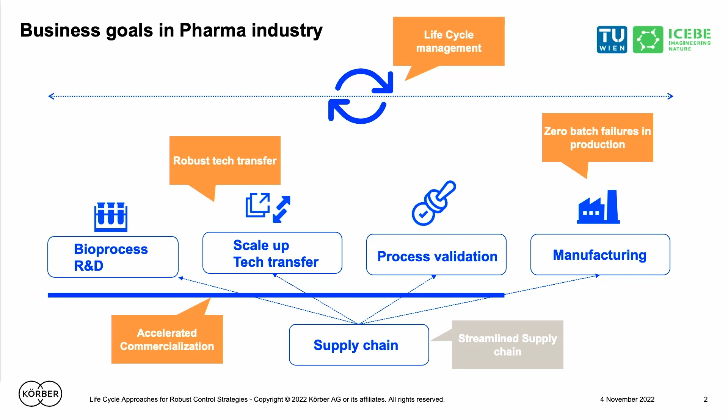And I think that's very important to mention that whatever we do, we not do only once, okay? So all business processes and data science methods, whatever we do, have to be made for continuous improvement along ICH Q12. I think you're aware of that very much, right?

So what is the task, actually, to fulfill this kind of thing? It's just this simple equation. So we just have to get the quality right on the right side. And we just have to find the relationship to the CPPs, to the raw material or critical material attributes, and that's all. Then we are done, okay?

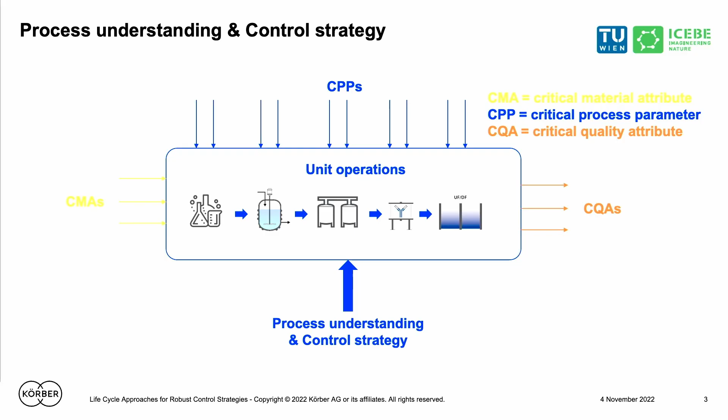The question is, it's not that easy. CQAs, we have about 15, probably in any biopharmaceutical business, whatever. And we have probably along the process chain about 400 CPPs and probably 100 CMAs or 15, probably we don't know them even. So the uncertainty plays a role.

So this is the equation which we have to solve. It's a multivariate, multidimensional problem which we have to address here. And there are two steps which we have to do to get a control strategy. First, we have to get the understanding how these things are related. And then the second thing is how to actually maneuver in there, right? I think these two steps we have to do.

The control strategy, for those of you which are not probably familiar with that, is mainly exemplified in ICH Q10. And it's about the linkage of the complete process chain, I will come back to that later, to, let's say, the drug substance, drug product, or probably the patient. It depends a little bit where you put actually the envelope, right?

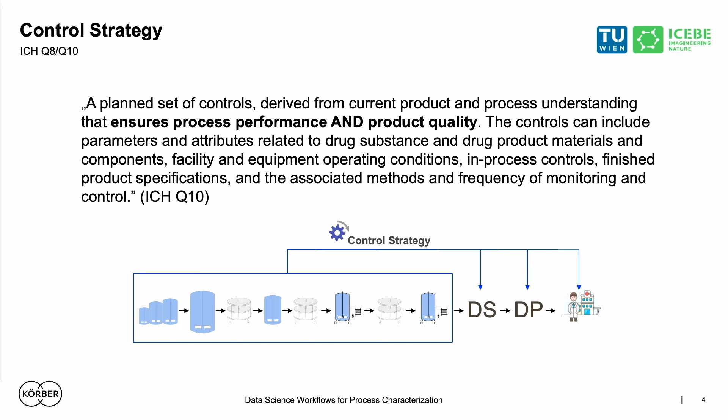And when you work in cell and gene therapy, probably you should really go into even looking at the patient more. So we have to set up control strategies, and I quote here something which we have also published, the article of the year, something in ISPE, on holistic control strategy.

What's the difference between a control strategy and a holistic control strategy? If you set up a normal control strategy on the left-hand side, this is what you submit, and then, in the future, the manufacturing, so that's the right side of the picture, will give you additional challenges. So there will be variability from the equipment, from the biology, from the aging of the equipment, of manual interactions, etc. Lots of different elements, which all come from the life cycle and the scaling.

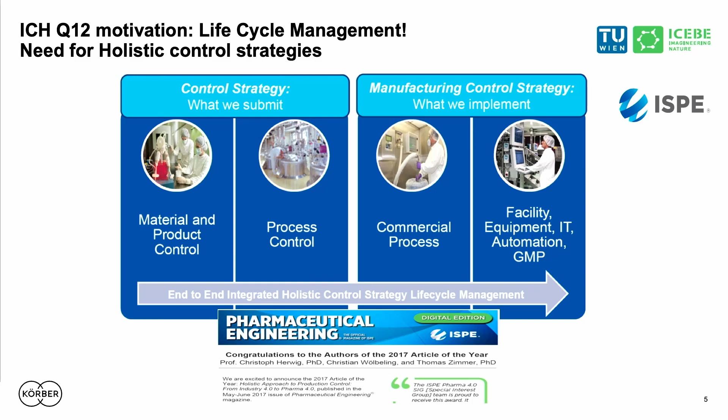And the control strategy has to anticipate those kind of elements, right? They have to anticipate all these changes, how to do that properly. And this is the holistic part of it.

The control strategy can be implemented on probably 3 different levels. This is a slide from Lawrence, a friend, quoting that level 3 is, of course, where we should not be. It's end product testing, right? It's about this bottle. I always count on that, but we should move off that. We should aim for the performance-based level. This is level 2, where at least we have some process understanding and we're maneuvering inside the design space. That's fine, but when you think about intensified bioprocessing for continuous biomanufacturing, you don't have time to really take a sample.

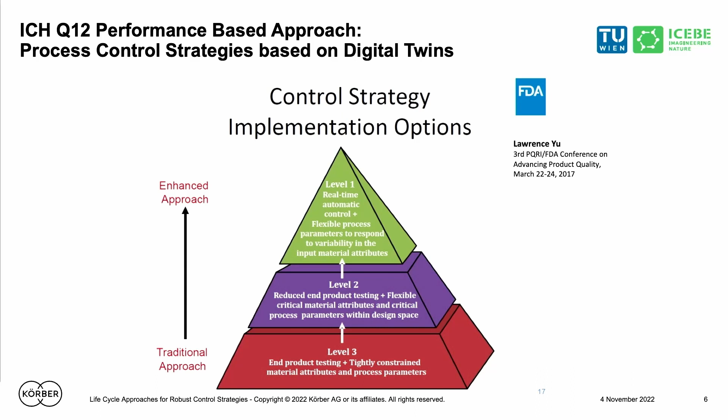So then we need to move to the upper part, which is real-time automated control with flexible process parameters to respond to variability in the input material attributes. Big thing. Are we there? I want to show you with my presentation a little bit how we can actually achieve that and get to level 2 and level 1.

Yash motivated this conference by saying we need a kind of 'how' approach. How do we really do that? So I want to show you a couple of elements in this direction and some prerequisites.

If you want to get something robust, you have to tackle variability. And the variability you have to identify, monitor, and control. There are a couple of methods around that. Of course, there can be models to identify this. This is monitoring, which is PAT, process analytical technology, a big part that always runs into that. And of course, data science.

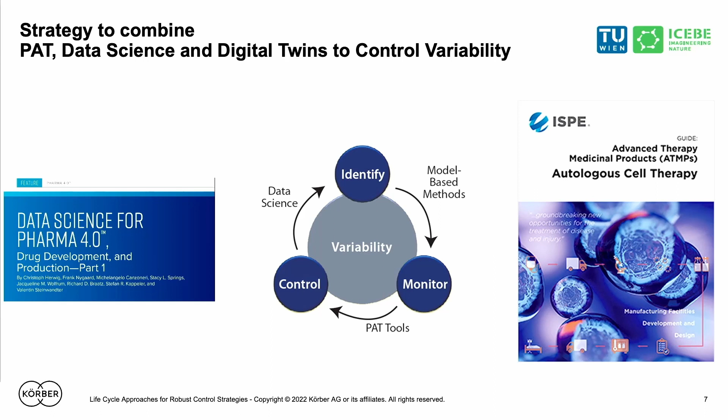We have published these kinds of things in the PE magazine on data science for Pharma 4.0. This is something with MIT and a couple of companies, Merck included. Probably have a look. Also in this autologous cell therapy good practice guide, just recently, wherever you are moving, in whatever kind of product, the task is always the same: it's tackling variability. Look at that.

And variability, of course, probably you can measure it. It's nice. Probably there's also uncertainty in there, and how to tackle this. You saw my comment yesterday in this conference. How to do that? So one enabler of that is definitely digitalization.

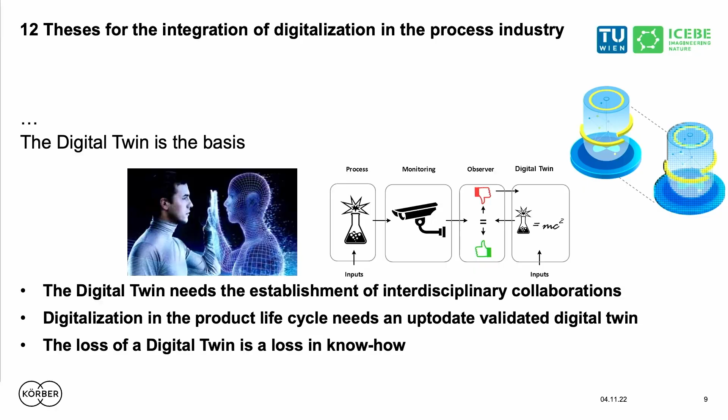There are a couple of hypotheses along that line which I want to show you. Here is one: the digital twin is the basis for integrating digitalization in the process industry. And I like the last sentence here: the loss of a digital twin is a loss of know-how. I would like to emphasize that I believe the digital twin is a means to capture knowledge and to deploy knowledge. We will see some examples here in this keynote.

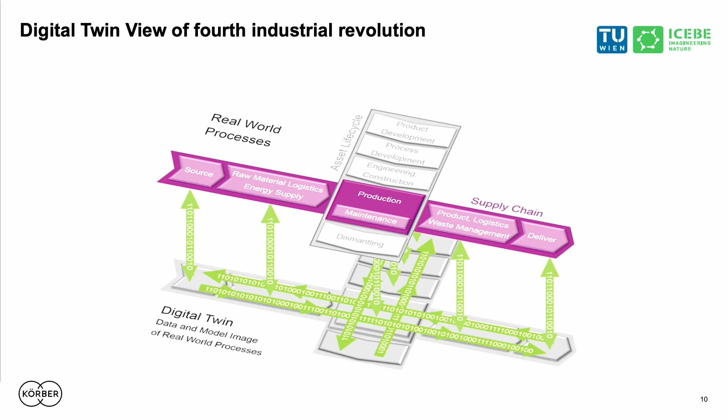It's a loss of know-how, and the digital twin can exist in many different dimensions. You see here the different dimensions: the supply chain dimension as well as the asset life cycle — these two elements. There can be a digital twin for all of that, but I'm not building a digital twin for all of it. I mainly work on the asset life cycle in development and transferring that to production. Of course, there should also be twins in the supply chain area — that's not my work. And finally, when you think about Pharma 4.0, it should be somewhat connected. There's no doubt. That's the motivation I wanted to give you here.

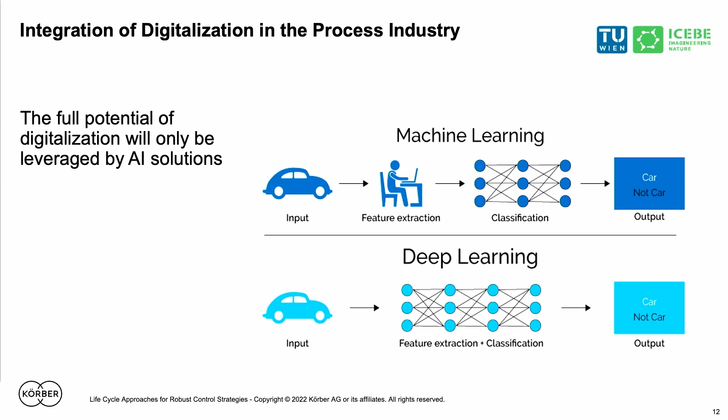Everybody says digital twins are mainly done by AI or machine learning, and all this is great. Think about the problem which we have in the control strategy: we have so many parameters, process parameters, etc., which may influence your product quality, and we have so few observations. So lots of P's, parameters, and less of N's, observations. We have a completely different approach than what Amazon or Google is doing. They have big data. We don't have big data. We have a problem to identify these parameters. How can you solve an equation set with 400 unknown parameters, with 50 observations?

Very difficult, right? Therefore, what we need to do is we have to constrain the problem, okay? And constraining the problem cannot be done by machine learning or AI. It first needs to be constrained by domain knowledge.

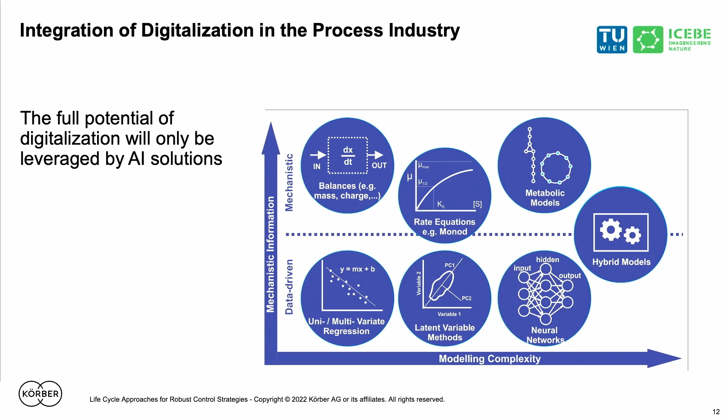Then you have to probably put some data-driven elements. When you think about just the influence of pH, let's say, on cellular metabolism, it's very difficult to explain that mechanistically. I think you are with me, right? So in this way, there will be, of course, data-driven parts, and the real truth will finally lie in hybrid models, okay? So on the right side, it will be a combination of these things, and we are building hybrid models. I will show you how we do that.

But before we go into that, how to set up these kind of models, I even animated that slide just to show you that what we are doing here can be done in an automated way. We are using, for setting up these digital twins, good modeling practice, GMP.

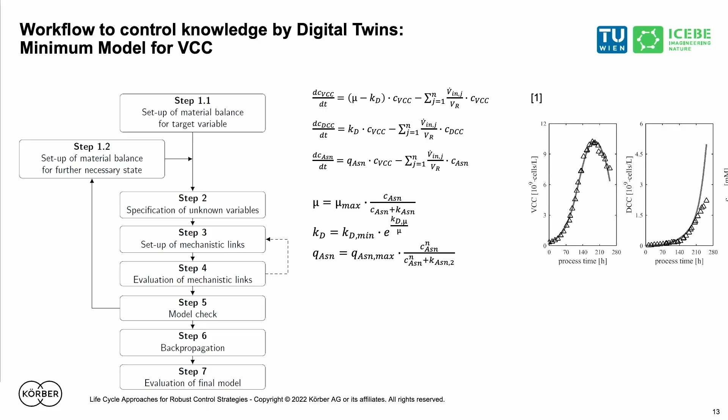This one doesn't need to be reinvented. There are steps which actually get to a minimum targeted model. Here, for example, just estimating viable cell count, something like this. And of course, you can model an elephant with 60 parameters, right? But there is a huge risk of overfitting, and there is a huge risk that you have many parameters which are actually collinear, and you cannot really differentiate, and you have multiple solutions, right? You have to make sure that you actually calibrate your model, that the model parameters are purely identifiable, and you know the sensitivity of these parameters, to keep that short.

And this is all done in this workflow, and it can be automated. We have done that, and we do that for many companies. We do that as services, and we implement that directly, this modeling practice workflow.

So it depends on the data if we can really do that. Probably if this kind of set of equations is not sufficient to really reach your goal, then probably you have to enhance the data set and you have to go step by step, right? But first we say, give us what you have, and we look how far we can actually exploit that, before we say, oh, we need all the data. That's not the point, okay? First, let us see for the certain goal if we can reach it with this data set, okay?

And therefore, we spend more time actually in defining the goal than actually we need time for the generation of the digital twin. You cannot have a data set and say, let's model this. We'll set a clear goal with clear acceptance criteria, and then you will be successful.

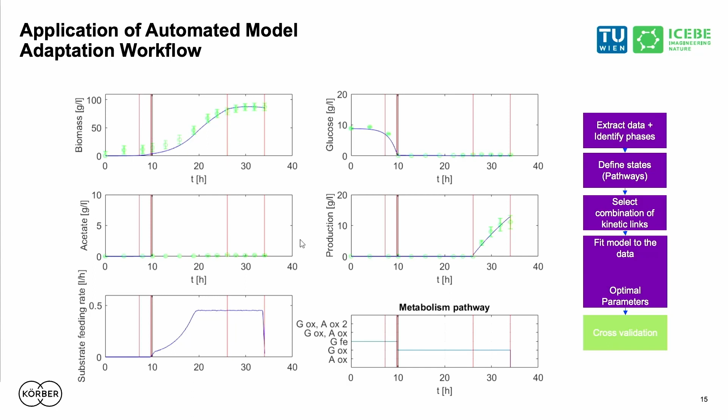And the good point is we are independent of one modeling nerd, which we are all dependent on probably, and if he leaves, everything breaks away, okay? I think there's always a problem with these models, right? They have a negative perception for that reason. I think we can change that if we have automated that, okay? And the data science methods are all there.

So that's about how to set that up and also to get these adaptive. What to do with it.

Of course, we have to identify CPP, CQA relationships, okay, to get process understanding, and of course we can do DOE. But a DOE is only the solution in case you have no idea. You shoot actually blindly in all directions, right? It's an explorative approach, okay? And then you find out what is actually related there.

If you have knowledge, if you have, for example, this kind of digital twin available, you can make use of it. So we are going very much on the right side of this and make very targeted model-based design of experiments. They are much more targeted and there is much less effort experimentally needed for that.

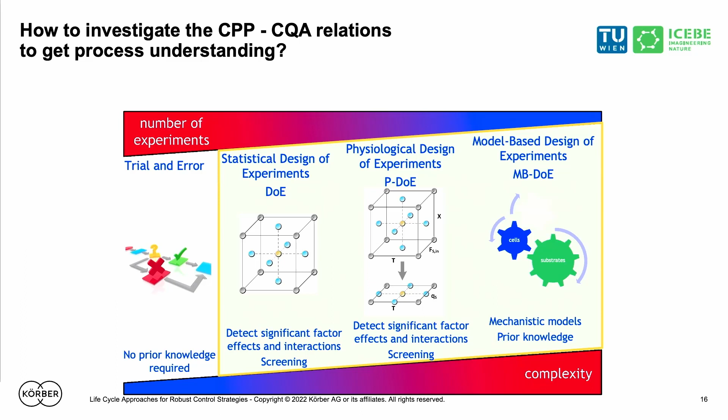Think about, let's say, when you have this normal cube, the statistical design of experiment, you have to set the boundaries. You don't know if these boundaries are okay, if you can actually execute them. You don't know where the optimum actually is, and probably after this cube, you have to run a different cube in a different area. So you have one cube and another, which you have to set.

If you run model-based and you're actually optimizing information, so Fisher information matrix would be the keyword in this direction, you don't have to set the boundaries. The system will find the boundaries by itself and the optimum in there. Very, very neat approaches. So the message is, if you have knowledge, use it also for experimental design.

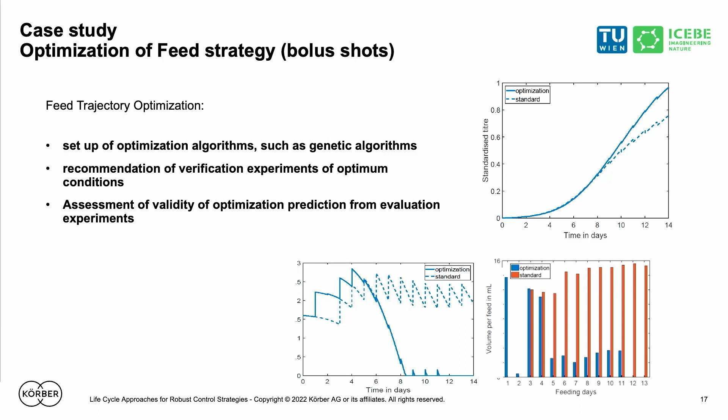And of course, we do a verification experiment on that. But if you would do that in an experimental design, you have actually 13 bolus additions, right? You would have 13 independent events which you need to design. Good luck for an experimental design in this direction, okay?

If you have a model, use it also for experimental design. But more important, when you think about the control strategy on level 1, the real-time thing, we have to bring the digital twin in real time. I want to show you how we actually do that.

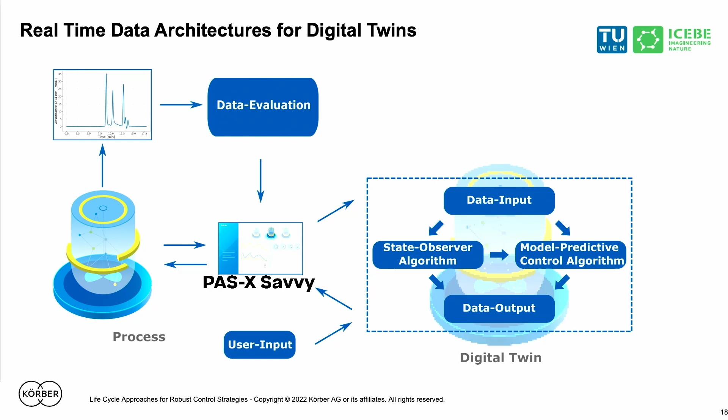We link the process on the left side to the digital twin on the right side. We have PAT in the process, we evaluate the data, we feed it back over our tool into the digital twin. On the right-hand side you have two elements: the state observer algorithm, and the model predictive control algorithm. I'd like to show you both elements, what you can do when you deploy the digital twin in real time for those two cases.

First, the state observer algorithm mainly predicts what you are going to see, process events, etc. I tell my students, if you do that, you know when you can go home — it's a very good thing for them. So you have this digital twin: on the right-hand side you see the data coming in real time, and then you have your model-based prediction, kinetics, where we're ending up when nothing is happening. You can use that for identification of the harvesting time point, identification of when you need to feed something, when you go home, when something goes wrong — all these kinds of things.

In the middle you have this kind of observer, a particle filter — a Bayesian approach where you do a state estimation between the process itself and the digital twin, so it aligns. It's also something that has been around for 20 years.

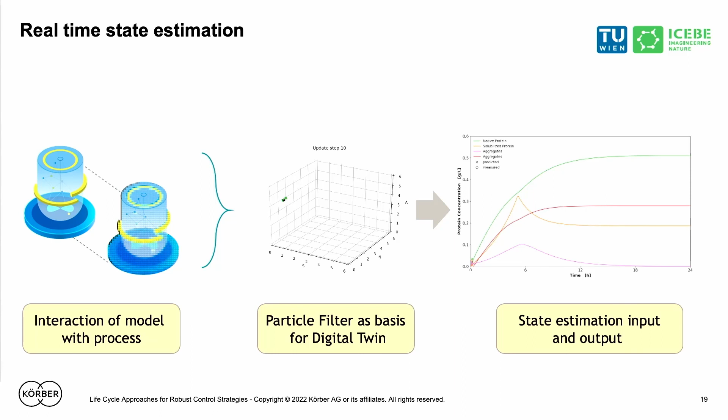This applies very much to intensified bioprocessing and in continuous biomanufacturing. I want to show you our approach on continuous biomanufacturing as another example.

If we run continuous, we need some measurements. They may be very scarce at the moment for CQAs — the quality attributes can hardly be measured along the process chain. But there's probably a solution: link the digital twin to the system. Because the digital twin links CQAs with CPPs — it links inputs and outputs. If you have this twin established, you only need to measure one of these two.

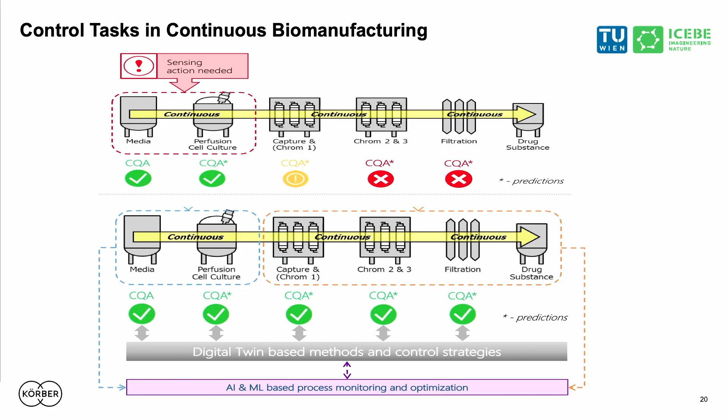It's a means to measure less, you can imagine. So if you measure only the CPPs, you can extrapolate what the output CQAs will be, and then you probably get rid of these elements. That is one thing you can do.

So you get the PAT tools directly — of course I had the process, but these are the reference analytics — with the goal of getting rid of additional QC measurements. So you can directly use these tools for the QC release. I'm working with Agilent on this; we also get MS-TOF for CQA measurements online into that. That's also interesting, that you directly measure CQAs on this.

But that's on the long run. The main message here is it's not only about digital twins, but also the link to PAT — you have to think about both. First set up the digital twin and think about what it, the set of equations, really needs to be observable — so define your PAT strategy. Define what elements you really need to measure based on the formulation of your digital twin, not the other way around. Don't say, 'oh, I have a Raman system and then I measure' — that doesn't help at all. Turn it around to have observability of the entire process and go from there, then select the measurement you really need in PAT.

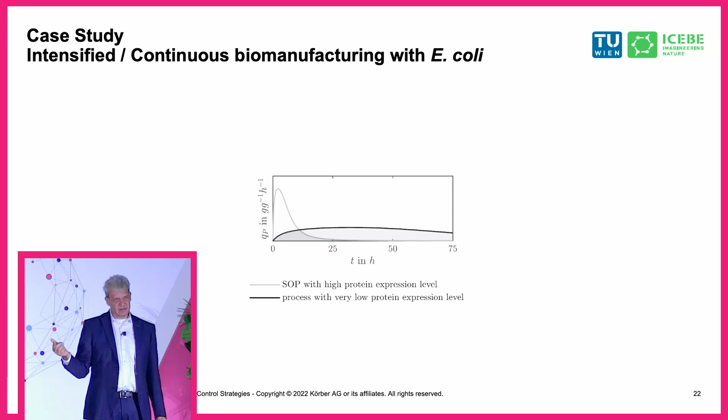I'll give you an example on continuous manufacturing in the microbial world. For those of you who work in that world, you induce the system by hitting the cell on the neck, so to speak, and say 'come on, you produce now a product you don't want to produce,' and in 4 hours it will be dead. That's this steep curve. But if you think about continuous manufacturing, this will not work — we have to have happy cells, and I like that we are all alive.

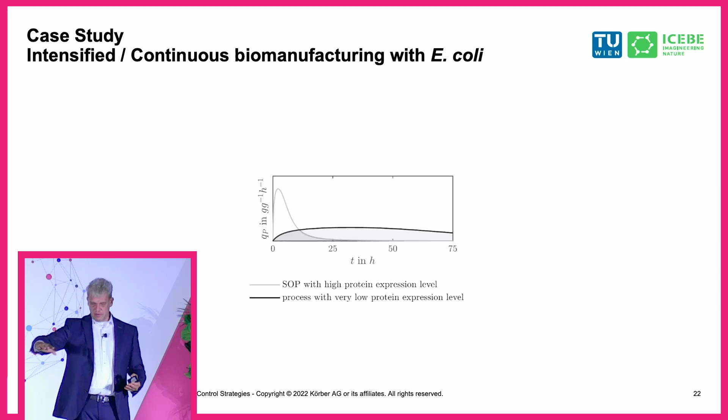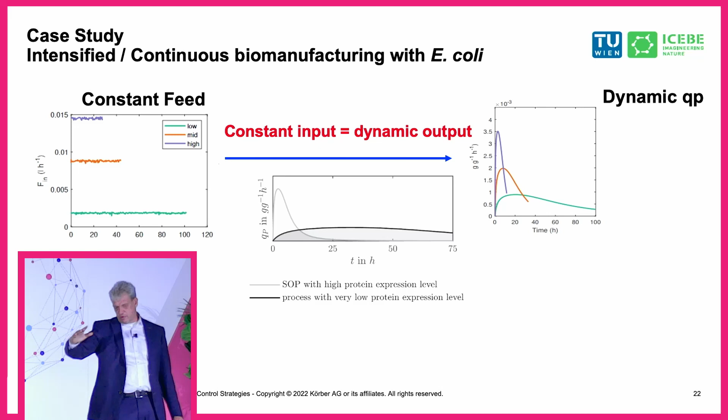So we have to move that into a different concept. We have to have tunable promoters and think about how to get to a more stable, specific productivity. We can already do that if we change the feed, for example. We've done this before, patented also with Lonza earlier, but then still the qp is still dynamic. You see the green line is already getting to the target, but it's not okay.

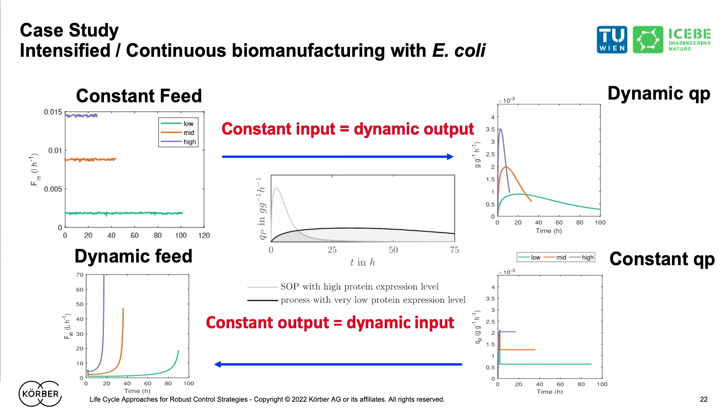But what we are now doing is we have a digital twin. You can invert the problem, so we go backwards. We say we want a continuous, constant, specific productivity, and we ask, my dear digital twin, how should the feed rate be? This is what we are actually doing. This needs some more enhanced control laws. It's a feedback linearized control law, which is quite difficult because it's a highly non-linear problem. Eventually you control a flow rate, but the control law itself is a bit difficult.

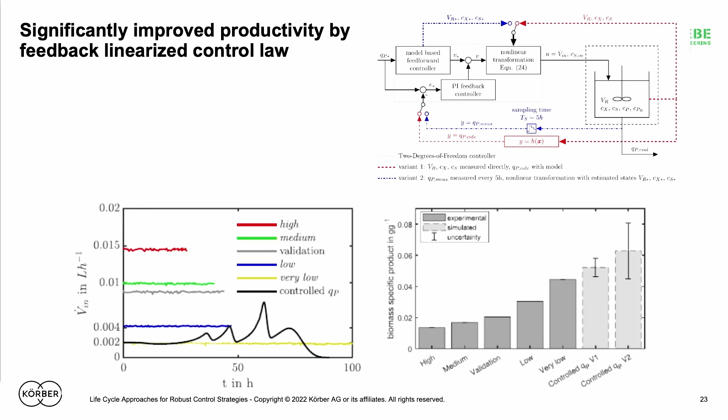However, what you see here is you get much higher product. You see on the lower left corner this strange, bold feeding strategy, which is not obvious. This is what we are doing. The message is, if you have a digital twin in real time, you can invert the control problem and really enable continuous manufacturing, else you would have never thought of doing that. I hope you see the benefits.

We have also deployed these kinds of digital twins at 100 cubic meter scale, with model predictive control as a feedback controller, compared here to a classical PID controller. This one is only looking at a set point, and the PID just follows the set point. You see it on the left upper corner, right? It just follows this.

But the MPC is doing something else. When you see the right upper corner, it actually deviates right now from the set point. Why? Because it's predictive. It looks into the future, it has a certain prediction horizon, and from there it asks: what will happen? How can I optimize my productivity? And when you see the lower right plot, it has actually increased productivity compared to the PID.

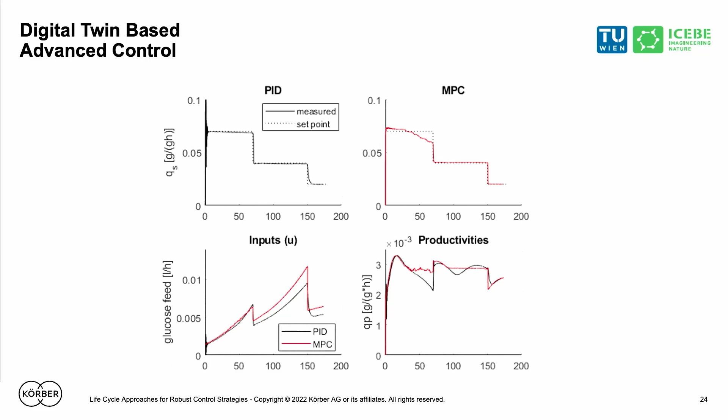It has seen that if I had run on the set point, there would have been a metabolite formed, or a side product formed, which would have been negative to my objective function of productivity. We do these things, and this is implemented in industrial GMP biotech at 100 cubic meter scale, with Novartis. So this finally gives us robustness, and it's a very sound control strategy.

So far we only looked at one single unit operation and we are optimizing that one. But finally, if you think about the control strategy, it's all about the complete process chain. So what do we do for end-to-end control of the system? Continuous or not, it doesn't really matter, but how do we actually get to the final product quality, and not only optimize individual steps? The task of the control strategy is getting the final drug substance, drug product, or patient quality, whatever it may be.

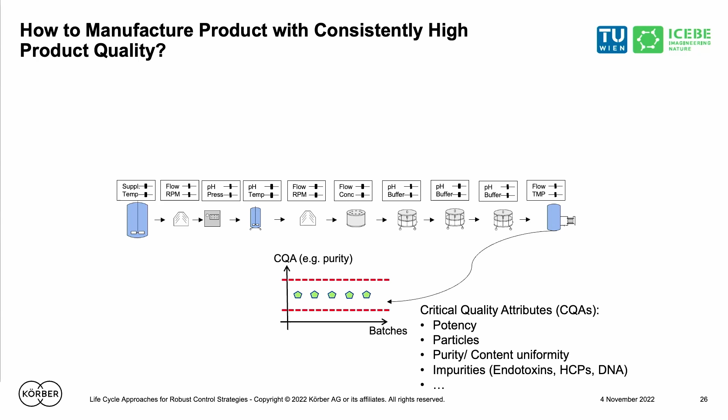So we have to make sure that this is happening. Think about this bottle. What's the problem? If we now have optimized each of these unit operations, we control each one, and we have a certain normal operating range, and the operator is trying to stay at the set point inside the normal operating range. Probably they go a little bit left, a little bit right, but still in range. And the next unit operation does the same—not exactly as I said, but a little left, a little right, and so on. So the point is the interactivity between the unit operations.

We have done so many root cause analyses of out-of-spec events where the MBR, the EBR, and the MES were all fine, everything wonderfully settled, but the root cause was the interactivity between the operations. So if you shift a little bit, that interactivity drives you to fail. Think about this bottle.

Nobody to blame, it looks like, right? Because everybody has done his job. But this is really what happens.

So what we need to do is think about a holistic end-to-end control strategy which takes into account those interactivities. You can do that with linkage studies, spiking studies and cross-characterization. So you spike here or there. Best would be to spike it even in manufacturing, but you will never do that, so you do that in small scale instead. Very, very difficult to do, right? So we have to find other solutions.

What we are doing is this approach with a kind of integrated process model. I'll show you how that actually works. So we feed in certain input parameters from one step to the next, and we propagate the distributions of the inputs and outputs over the full process. We can do that with Monte Carlo simulations.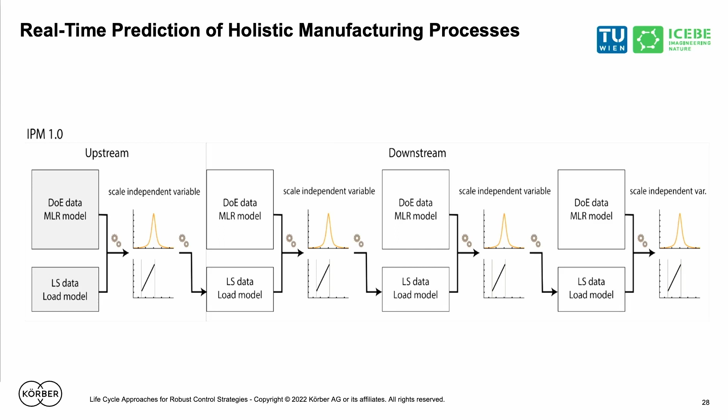And then we see finally the out-of-spec probability. Here, for example, you see how you actually identify a certain intermediate acceptance criteria, the specification of a certain unit operation 3 here. What is the specification of a certain CQA, and how does this actually directly influence my drug substance quality?

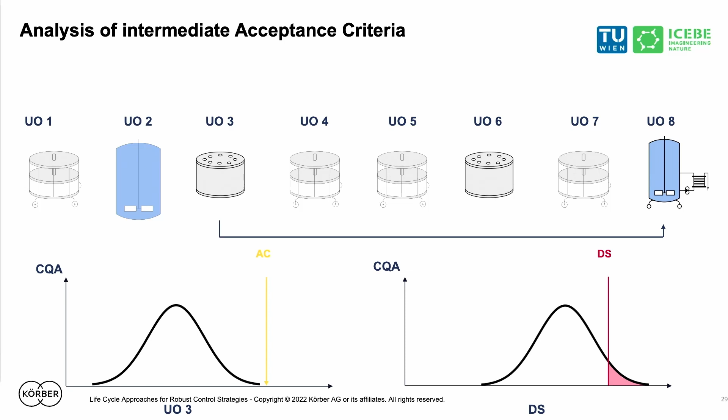And inversely, if you set a certain drug substance quality at the end with a certain probability to fail, 5% or hopefully less, 1%, right, then inversely you can identify an intermediate acceptance criterion like that. Very helpful to do that, okay? How else do you develop a certain process if these intermediate acceptance criteria are probably not known, right?

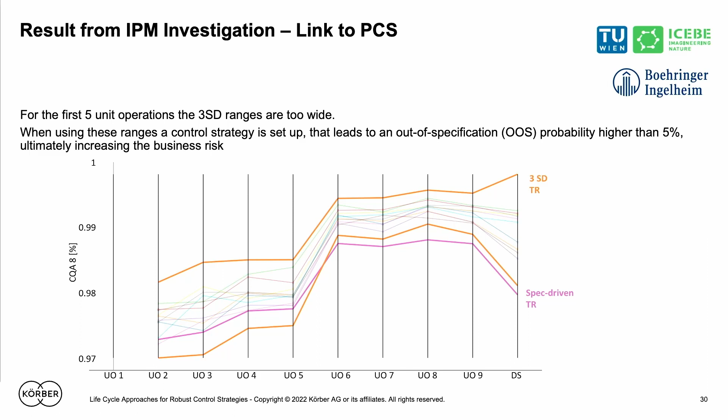Okay, so we are doing this with Boehringer, with Takeda, with lots of companies in this direction to actually set up proper control strategies. The same thing you can do for calculating then your normal operating range or your proven acceptable ranges.

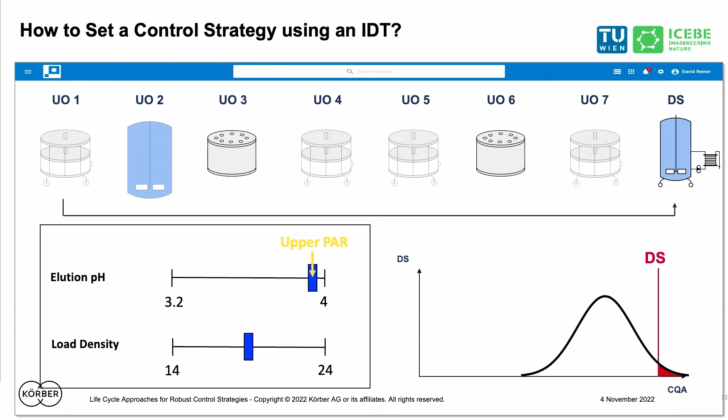So this one we can tie together. That means we have identified individual models. I showed you that, how to actually do that. And if you have these models available already, we can already integrate them into these process chains, okay?

So I hope I could show you the bright side of this moon, what we can do with these kinds of digital twins to get this going.

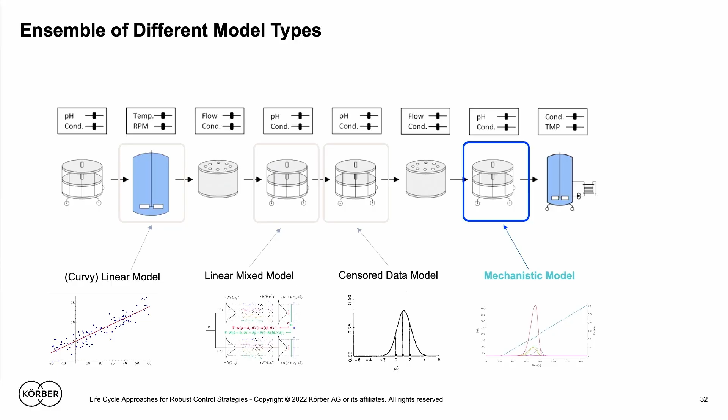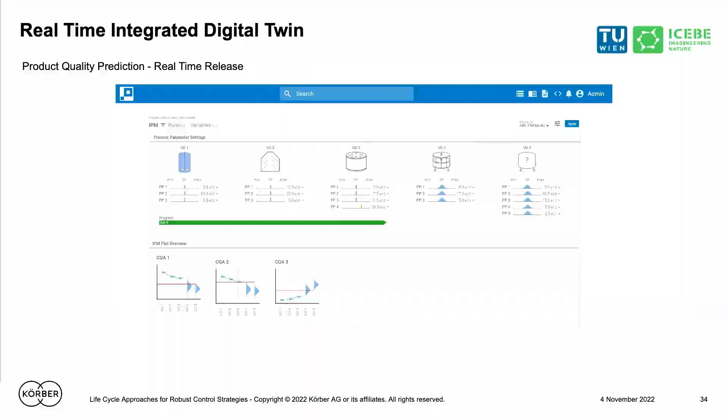And with this, we have a probability of failure which we can get in real time. We have done that. It's not a mock-up, it's a software tool which we have developed and it's available for use here. So you see here finally how the product quality will probably fall into a certain probability spec at the end of unit operation 5.

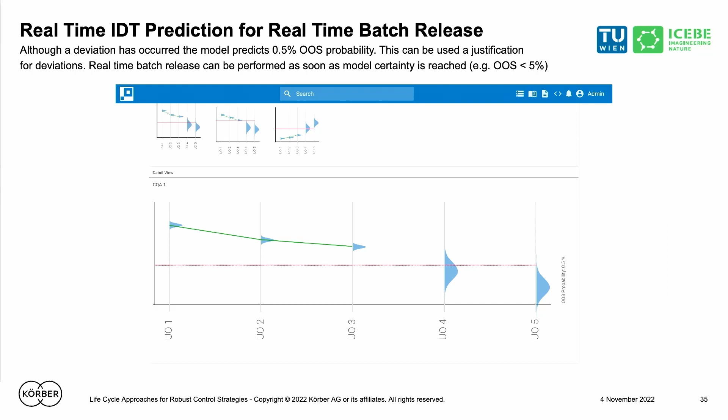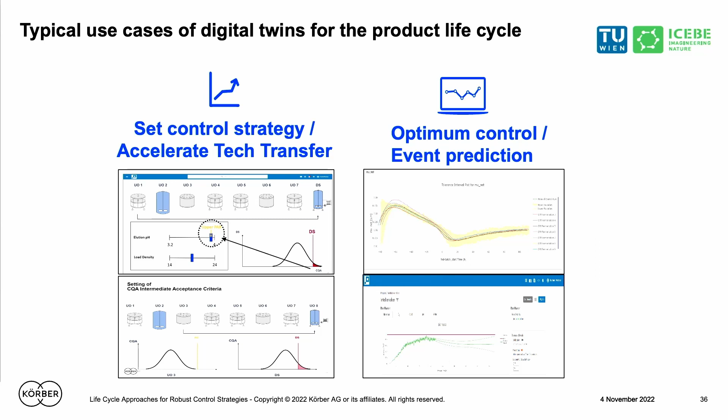No, we have to have a direct, real-time, compensatory approach to get this right. And only statistical process control doesn't tell you the root cause, what I have to change in order to get it back. Our approach, especially here with this integrated process model, helps you actually get the process back.

We assess with the data science approaches, which I have shown you, if the control strategy is still okay or not. If we probably run in the same normal operating range, but just a set point a little bit left or right, it could be one way, so we don't have to have any resubmission or anything like this. It just recommends to run a little bit more on the left or right side.

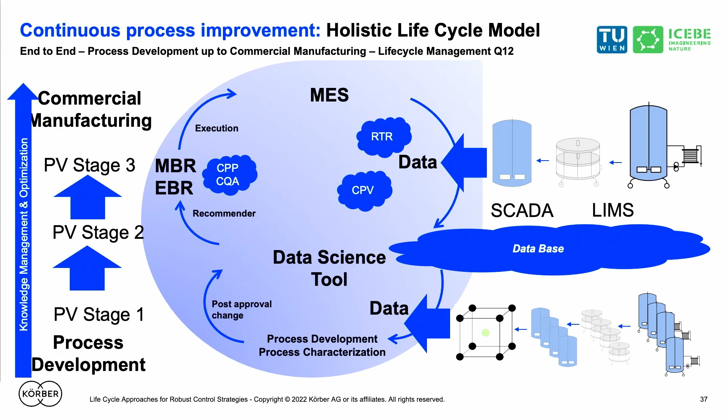Or, of course, it would be even better to redo the control strategy and change the normal operating ranges. But this is an approach which we do very iteratively, checking out CPP, CQA relationships on that basis, linking manufacturing and development data together.

That was the bright side of the moon. I just come to the part which we have discussed yesterday already. We need some data architectures, data management, some prerequisites on that.

One thing we can do is analyzing MES data. We do that also, right? I come with a company, Körber, which has, of course, the PAS-X tool here. And we analyze MES data alone, and you can plot them, and you can easily already look at that.

You can probably have a look at yield optimization, but it doesn't really tell you why this is the case. It's mainly a dashboarding kind of thing.

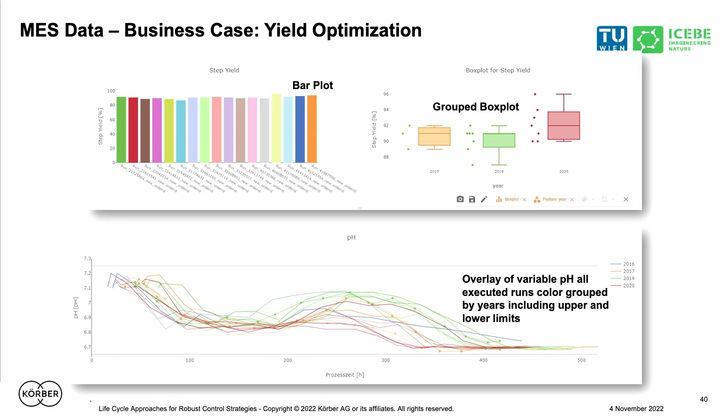In order to get deeper into there, and really find out why this is happening, you have to include more data, not only MES data. I also have the problem that some of the things are not hardly readable, but you see that.

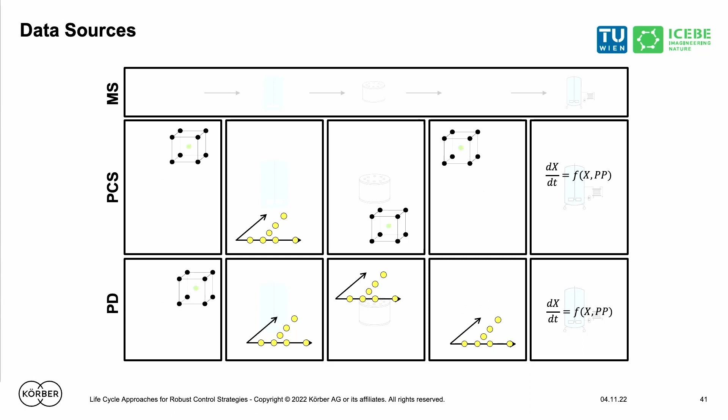If people ask me how many runs do I need to set up a digital twin, I say always, it depends. 100 runs of a manufacturing run will not be sufficient because you have not perturbed intentionally all of the process.

You have probably variability which comes, like we have seen here, but you don't know why. So in order to really get to a control strategy, you have to link manufacturing data with development data. I think that's very clear.

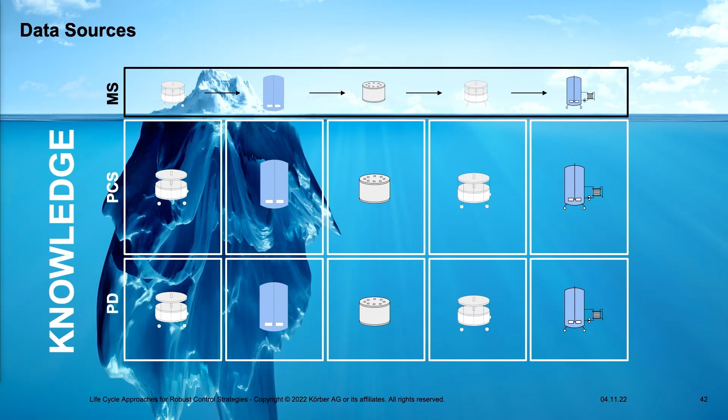And we have to have means to get this done. I think this is closer to what we discussed yesterday. Let me show you a picture of how, I think I don't need to discuss that, right?

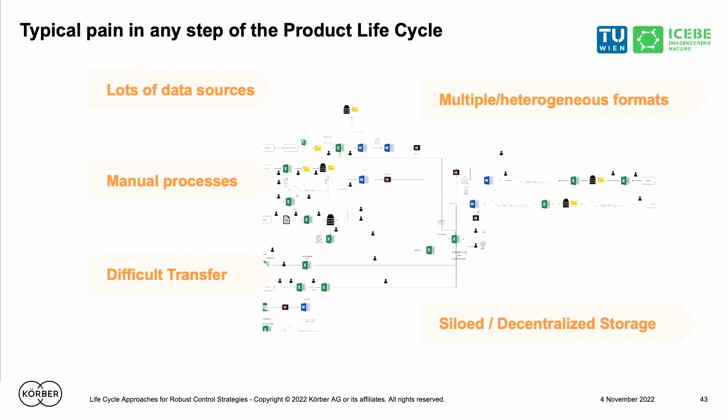So I think you're all aware of this, okay? So we have to change. This one, I think we discussed it yesterday. But we have other difficulties, let's say, or challenges in order to solve that. And that's on this picture.

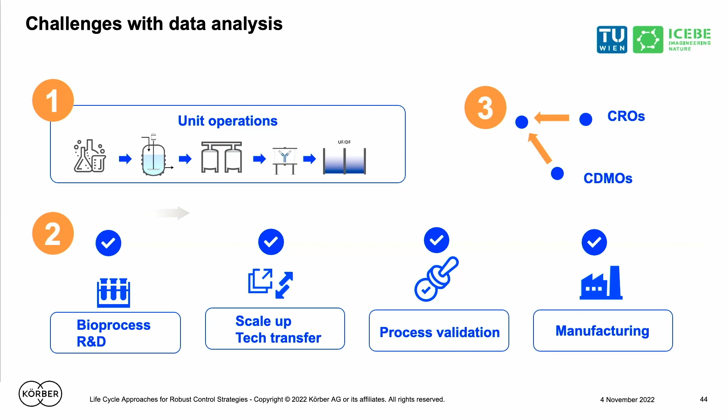We have to get data from across the complete unit operation, the complete process chain. We have to get the data across the complete life cycle, right? And we have to get the data from our partners, right? They all have to be together in order to do this holistic control strategy. There's no doubt on that, right?

We are collecting all the data. I will not go too much into detail. We have REST APIs, data push tools, data crawlers, etc. in order to get that done. It's never an excuse, we always get the data imported, customized, configured, whatever. But the driving force needs to be the use case in order to get there, right? I think we discussed it yesterday as well.

So what we are trying to solve is getting all the data into one data matrix, okay? We have all the operations, we have all the life cycle approaches, and we get everything in one data matrix. But the data sources are completely different. We have time series, quality data, spectra, images, 2D data, 3D data, etc.

If you would dump that all into data analysis and give it to a statistician to find out CQA, CPP relationships just on this data, it would just be a mess, okay? You cannot dump time series data like that, just like this, into data analysis, right? It needs context. We said this already.

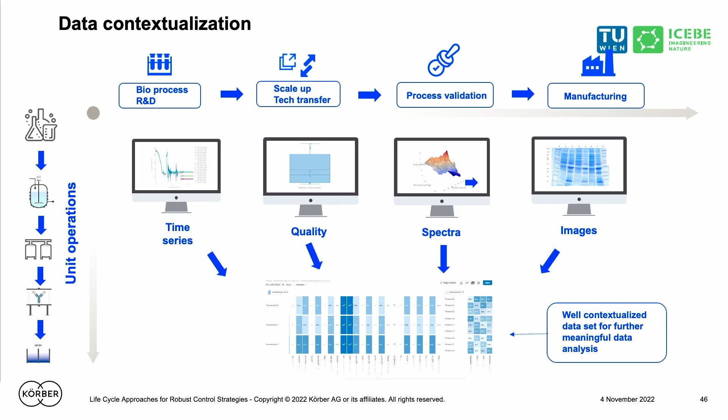And there are multiple tools which we have developed in the last 10 years for setting context. Automated phase setting, for example, of time series. Automated calculation of features from pictures. Extraction from pictures. Alignment to events. All these things can be done, okay?

It's very important to have that automatic. In case you want to know more about it, we can talk about that. But data contextualization is not to be skipped, not at all, okay?

And there are a couple of, let's say, manual tools, like I just discussed. But there are probably also other automated tools, which we assessed recently, in these publications here, together with Anurag Rathore, probably you know him.

And this is about knowledge management and finally getting to data contextualization. And here, this plot you see on the y-axis shows tools listed in literature, so the scientific view on this. And on the x-axis, you see the importance ranking by industry. Okay, and you see there are a couple of tools like T6, T7, T1, where you say, okay, we need capture tools, we need visualization.

Yeah, we all visualize already in industry. I think we are fine there. I think that's a kind of knowledge management tool by visualization. That's fine. You see that some are centered. There's also the models and the simulation. T9, for example, this is a model.

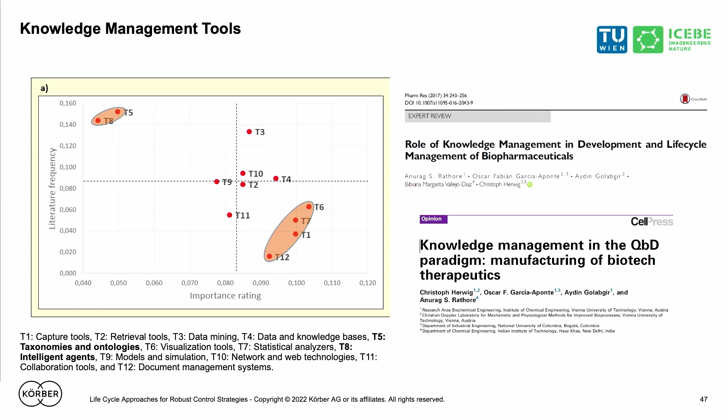But there are a couple of them which are very much in the forefront in the publication space. This is T5 and T8, and these are taxonomies, ontologies, and intelligent agents. So let's put them all under the umbrella of ontologies here. In the moment we discuss taxonomies also. I believe that these tools are really a big enabler for automated data contextualization.

Getting slowly to my conclusions here. This all binds into Pharma 4.0. You may know this slide here from ISPE, okay? And these are the ingredients, the 4 pillars. But we have data integrity by design and digital maturity as the enabler. And I would like, with the last slides which I have, go a little bit into these 2 elements, data integrity and digital maturity.

Because if you are creating an analytic plot, which is finally ending up in an IND, even in non-GMP—so we are in PD, PCS is still stage 1 validation, non-GMP—but we are creating plots which are finally ending up in an IND or BLA filing, something like this, we need to retrieve the root data source of this.

And if you have a PCA plot or a multivariate data analysis plot, and you see there's some outlier in there—if I take it out, it looks a bit different, and I take another out, it looks different again, you know what I mean, these kind of things—you have to find out what was the real root data set in order to produce that plot. That's the reason why I believe this really belongs together, very strictly.

So that's about data integrity, in my opinion. Data integrity calls to combine data management and analytics. Conclusions—give me 3 minutes for concluding on that.

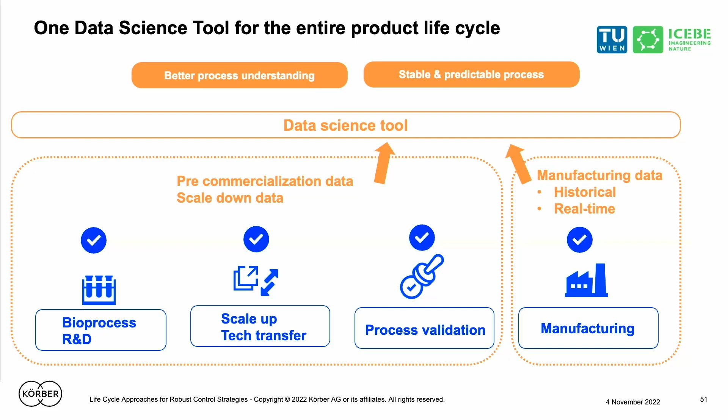So we have to have a tool which links the pre-commercialization parts of the life cycle and the manufacturing together. I think I have shown you that a real control strategy can only be done by feeding these two data really together. We have identified a couple of use cases or business cases which we can approach.

Here, especially with this end-to-end digital twin, just to name some of them: we can set up the control strategy probably, we can also identify PPQ runs, we can set control limits, we can make real-time batch release, etc. We can do that with these kind of digital twins. Okay, these are real business cases which we are proceeding with.

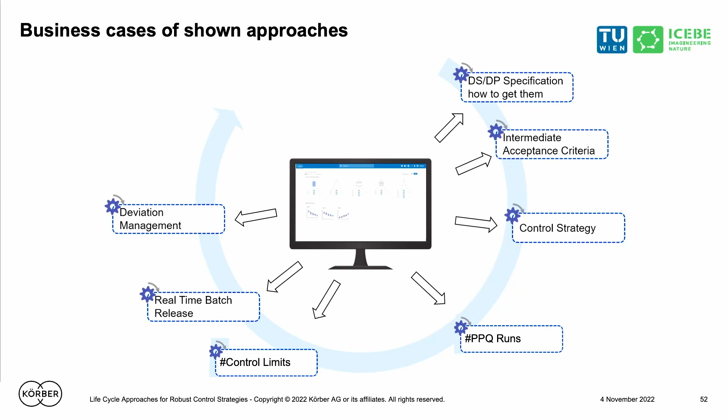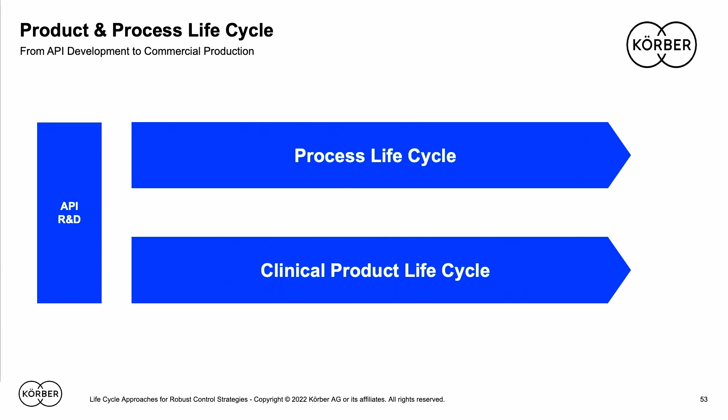Then I took some slides in from yesterday, our discussions, to see where are also the gaps here. We have two streams: we have the process life cycle, like I have just shown, but we also have the clinical product life cycle—these are the clinical phases. And I think, like I said yesterday, we have a data disrupt between these two streams.

Where are the clinical data result outcomes really getting back to the control strategy? I think we have to have a meeting where we bring this together, CMC plus clinical, at the digital summit, where we put this together and see what kind of data do we need for the control strategy.

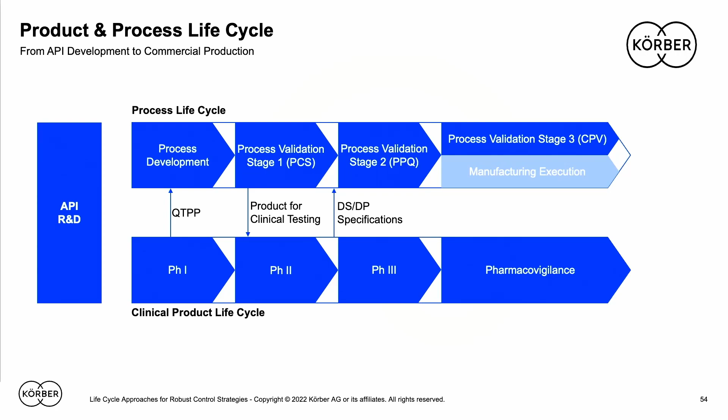And the hypothesis, on the other hand, is that I believe clinical studies are often with negative outcome because the process was not properly developed. We have a larger range of variability—you run quick and dirty to produce some clinical material and so on. In this way, I believe if we would work together closer, clinical trial results would be more positive.

We need a lot of tools for lifecycle management. It's not only about a PCA plot—there are lots of different tools which we need. We need data science; I will not go too much into detail on that.

Step 1 and 2 are, of course, trivial. But then step 3 is what is happening—I think that's the status now. Why is it happening? That's the control strategy, the process understanding, which we should directly have.

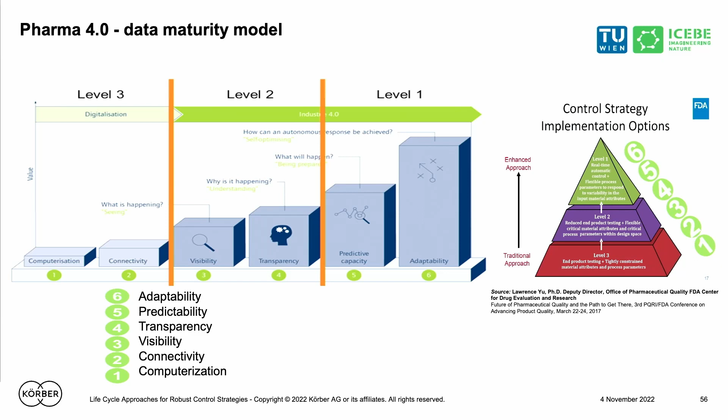And what I thought of bringing you over in this keynote are solutions for the other elements here in level 5 and 6—what will happen: the predictive capability and also the adaptive capability, number 6. Adaptive capability of the life cycle of the digital twin on the one hand, but also the adaptive capability of the control strategy. I hope I could show you what we need to do here.

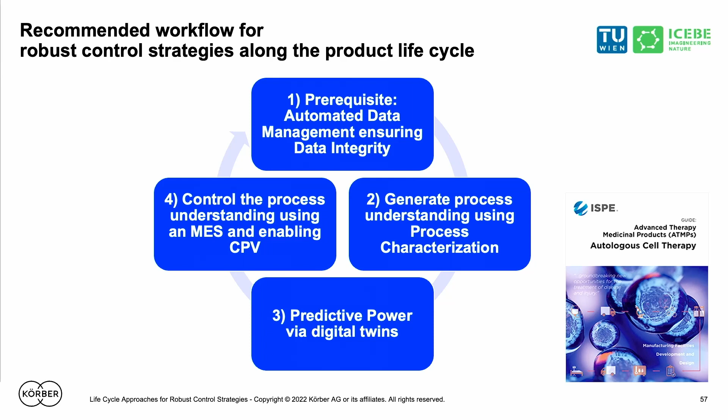Recommended workflow for robust control strategies along the life cycle: we need automated data management, ensuring data integrity; generate process understanding using process characterization; predictive power via digital twins; and then, of course, we need to link that into an MES, control the process understanding using MES and enabling CPV. I think these are the 4 steps which we see, and which was aligned also with this good practice guide which we just published.